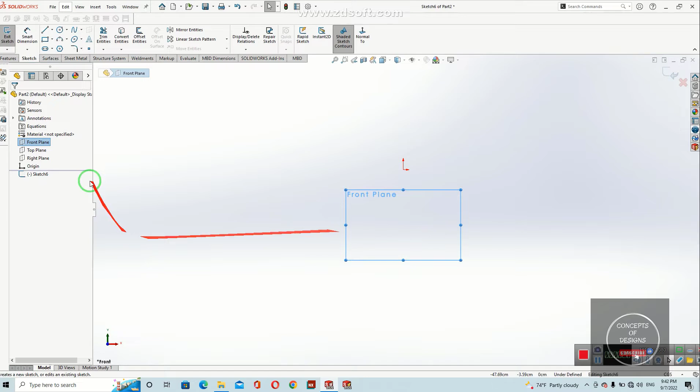Okay, first of all, we need to start with the front plane. My customer asked me to make it 1000 liters, so let's try a sketch or a shape that will give me 1000 plus liters.

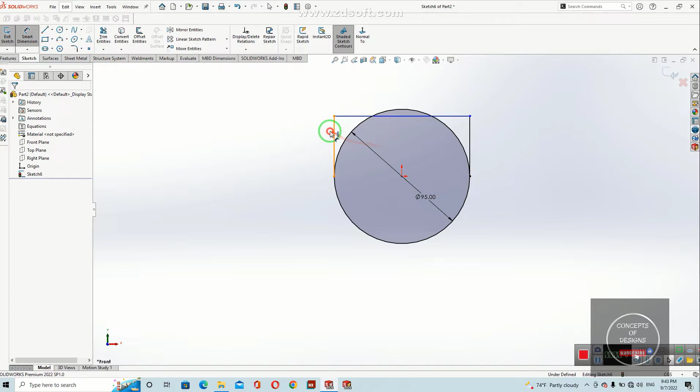So this one here, let's make it 95. I think that's good, that's correct. And this one here, let's make it around... okay, let me see. Okay, this one, let's make it 35 centimeters. 35 centimeters, that's great.

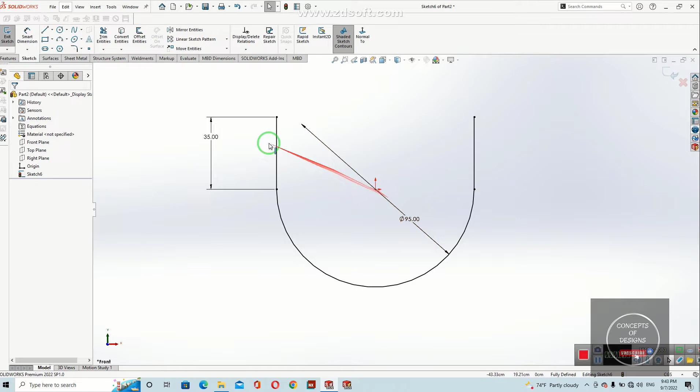And let's remove this, and this, and this. Okay, equal relation. Okay guys, so this is here our basic shape, and okay, let's test if it is really 1000 liters.

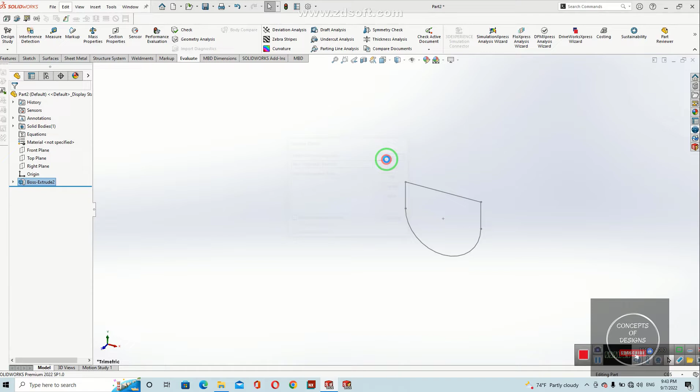So let's make extrude boss 150, evaluate. Okay, here is, yeah, okay, yeah, that's great. It is 1000 plus, okay, so our dimensions are good. So let's start with the other step here.

Let's make this sketch shows what is it built for. Okay, first of all, date is very viscous material, very thick and sticky, so mixing it is a very hard job.

So I'm going to make mixer plates here, and a mixer plates here, that move in opposite directions. For example, this one moves clockwise and this one moves counterclockwise, and they intersect with each other.

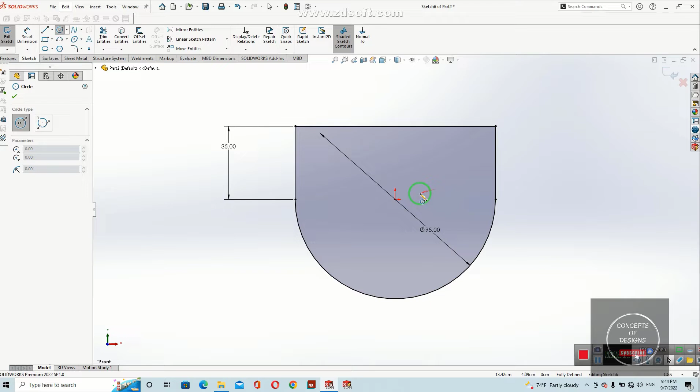In that case, it would have enough power to mix the date and make it homogeneous.

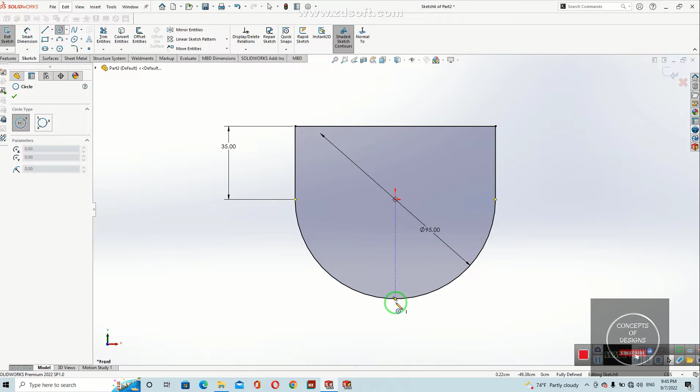And to bring the date out of this mixer, we should have here an auger, like a screw with a large pitch, around 5 or 6 centimeters, so it can move the material out.

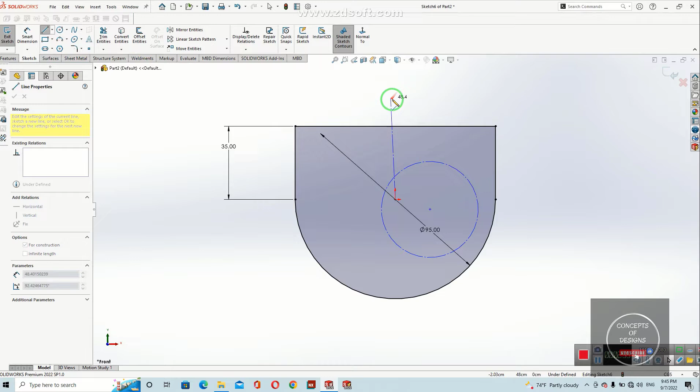So let's try to simulate this for construction, and let's make a vertical line here, and let's mirror this about this. Okay, that's great.

And we should, like, okay, we demonstrate our goal here. Okay, and this one here is an auger. I think it's enough to be 4 inches. 4 inches, yeah, okay.

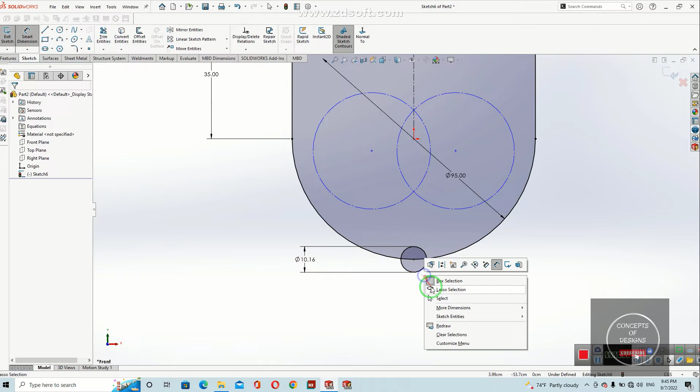This one here, let's make it 57.5 centimeters. Yeah, that's great. And let's make it here around 10, and make a tangent relation here.

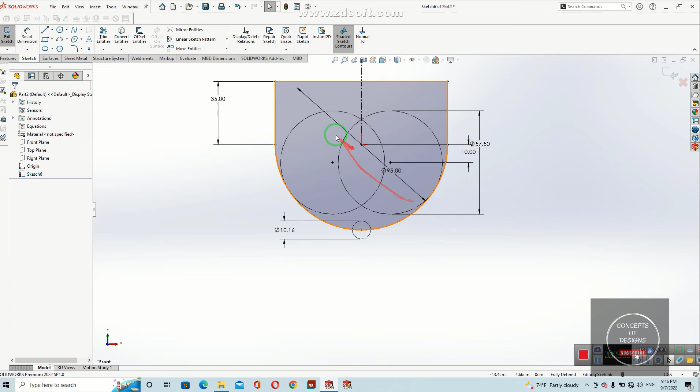Okay, let's make 12. No, it cannot be 12, it should be 10. Why 10? Because each mixer here, each plate, has an axle here and an axle here.

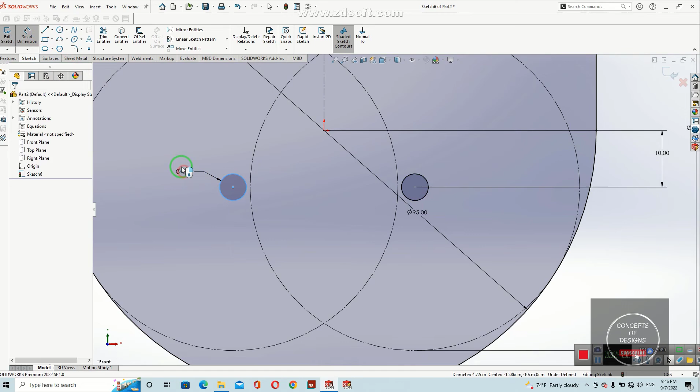And they might be 4 centimeters, okay, that's great. So if I made these plates closer to this auger here, it shall collide with the axles.

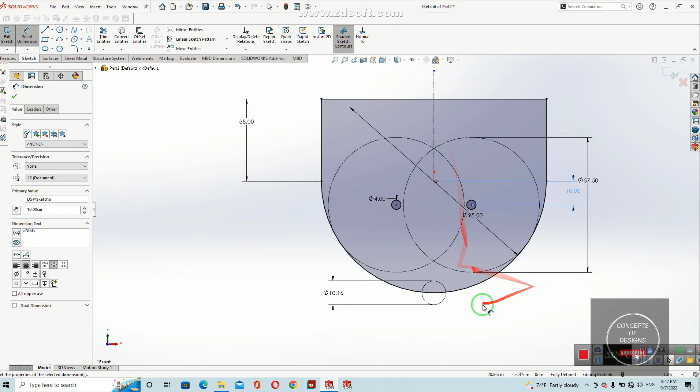Let's look, as you can see here. So I can do it, and it's enough to have a distance between this point and this point within 10 centimeters. So I think this one should be 8 or 8.5, I think. Yeah, okay, 8.4, that's great.

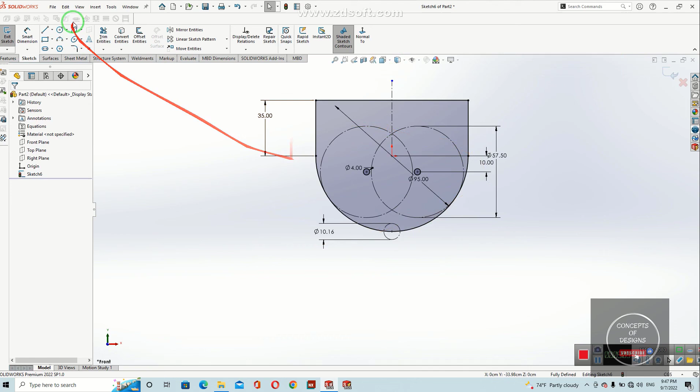Okay guys, so this is our basic sketch, and I think it's doing well. So I'm going to make this using sheet metal, and because this one here is an...